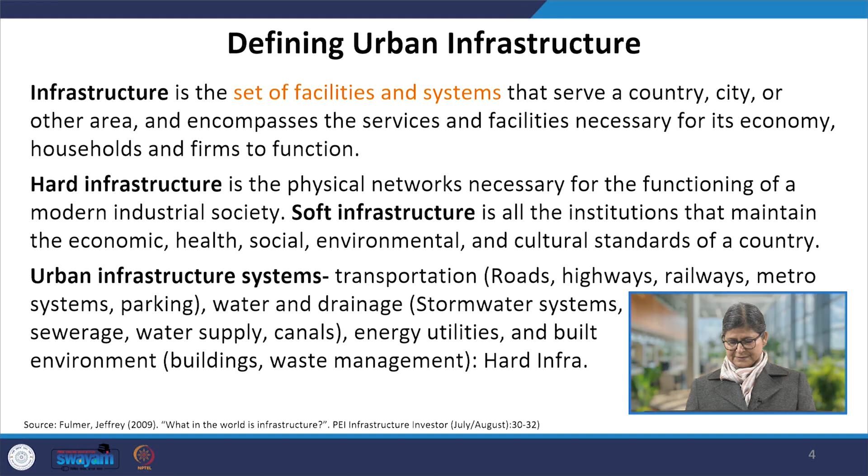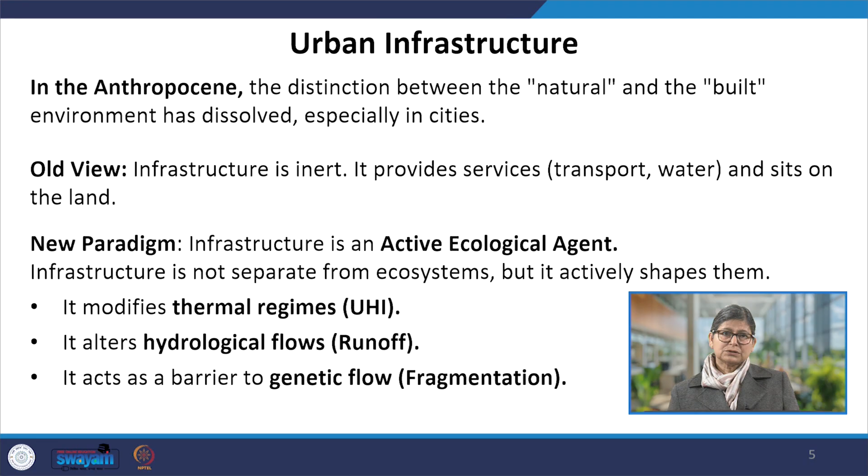In the Anthropocene, the distinction between the natural and the built environment has dissolved, especially in cities. The old view is that infrastructure is inert, it provides services like transport and water, and sits on the land. But the new paradigm is different. Infrastructure is an active ecological agent. It is not separate from ecosystems, but actively shapes them. It modifies thermal regime, alters hydrological flows, and acts as a barrier to genetic flow, causing fragmentation.

Urban infrastructure today, in the new paradigm, includes grey infrastructure: transport, water supply, sewerage, drainage, energy, solid waste, etc. Green blue infrastructure: urban forest, wetlands, ponds, green roofs, floodplains, tanks, etc. And social and institutional infrastructure, which again has both hard and soft components: health, emergency services, governance capacity, etc.

Negative impacts of urban infrastructure include habitat loss, fragmentation, hydrological modification, and pollution, whereas the positive potential is there, like creating green corridors, water retention, and biodiversity enhancement. Assessment challenges exist for urban infrastructure, such as quantifying ecosystem services lost versus potentially restored. This is one very strong challenge in urban infrastructure assessment.

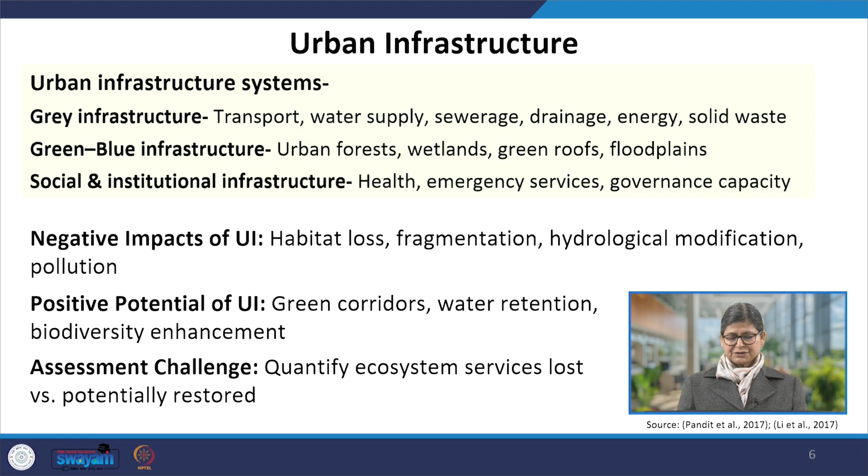Now, if we try to understand the theoretical perspective of infrastructure assessment, let us first understand infrastructure ecology. The transition to a grey-green-blue paradigm requires an integrated assessment. We must evaluate infrastructure not just on its engineering performance, like traffic volume, but also on its ecosystem service performance, like landscape permeability, heat mitigation, etc.

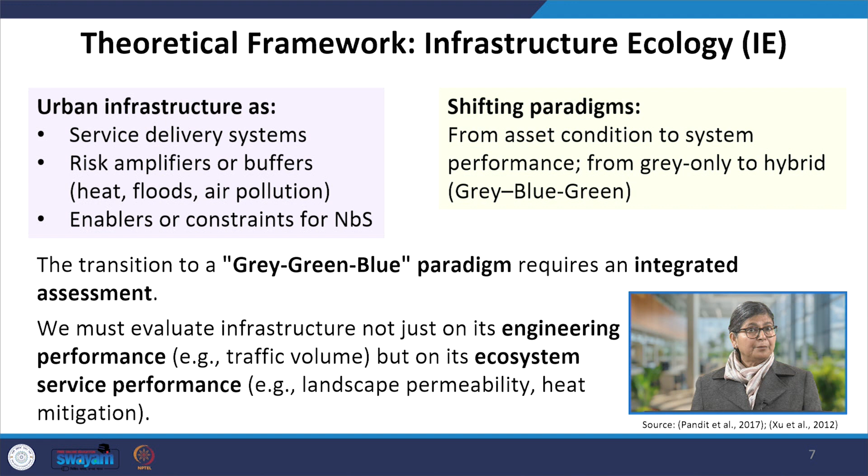We look at urban infrastructure as service delivery systems, risk amplifiers or buffers for heat, floods, and air pollution, and as enablers or constraints for nature based solutions. This shifting paradigm is from asset condition to system performance, that means from grey only to hybrid, which is a very strong shift in understanding urban infrastructure ecology.

Analyzing urban infrastructure not as isolated civil works but as a complex adaptive system analogous to a biological ecosystem is the major tenet of infrastructure ecology. The key interaction is the gray-green interface.

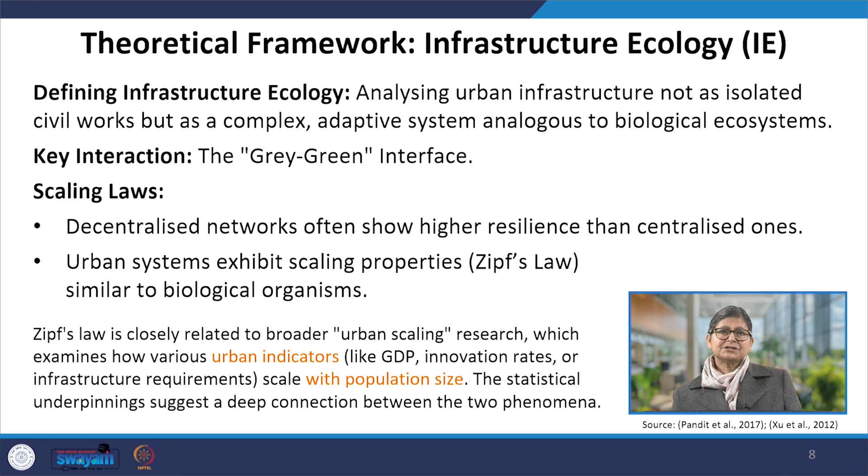Scaling laws show decentralized networks often have higher resilience than centralized ones. Urban systems exhibit scaling properties, Zipf's law, similar to biological organisms. Zipf's law is closely related to broader urban scaling research, which examines how various urban indicators like GDP, innovation rates, or infrastructure requirements scale with population size. The statistical underpinnings suggest a deep connection between the two phenomena.

Valuing nature based solutions in planning requires cost benefit analysis of NBS. We have discussed this premise earlier, but it is very pertinent to bring it back. To justify NBS in a performance based plan, we must value them. Grey infrastructure is easy in terms of cost, while green infrastructure benefits are diffused.

So we discussed several different ecosystem service estimations, and the last one, which we discussed in detail, is the total economic value: direct use like timber and water, indirect use like flood control and carbon sequestration using social cost of carbon, and non-use existence value, which also covers biodiversity.

In Bangalore, studies showed that lake rejuvenation had a higher benefit cost ratio than building new grey STPs when ecosystem services were valued. That is exactly the reason why we need to really assess these systems properly.

The economic imperative for why we integrate ecology is the resilience dividend. The CDRI Global Infra Resilience Report 2023 finding talks about economic losses from service disruptions, which are 7.4 times higher than the direct damage to infrastructure assets. What is the implication of this finding? A road washing away costs, let's say, X to repair, but the stopped trade will cost you 7.4X.

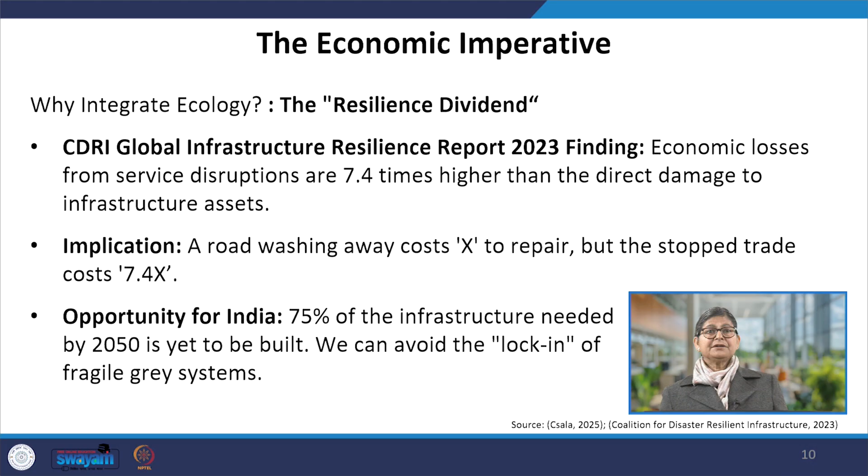75% of the infrastructure needed by 2050 is yet to be built. We can avoid the lock-in of fragile gray systems intelligently.

Now I will discuss, through a tabular form, the evolution of infrastructure assessment metrics. The dimensions are transport, drainage, built environment, and disaster resilience. The traditional way of looking at them includes vehicle capacity and pavement roughness index. We will also check performance-based ecological or integrated indices, like landscape permeability index, wildlife mortality rate, roadkill per kilometer, and carbon intensity of travel.

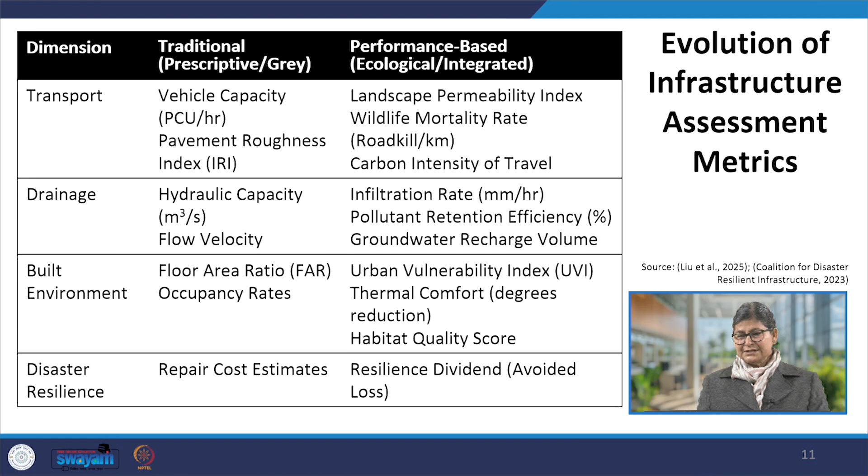For drainage, similarly, the old metrics were hydraulic capacity and flow velocity, whereas now we are trying to go for integrated ones like infiltration rate, pollutant retention efficiency, and groundwater recharge volume. For built environment, other than FAR and occupancy rates, we now discuss urban vulnerability index, thermal comfort, and habitat quality score. For disaster resilience, repair cost estimates is the old way of looking at things; now we look at resilience dividend and avoided loss. So that's how infrastructure assessment is evolving.

The barrier effect: roads and railways act as semi-permeable membranes dissecting habitats. Populations isolated by highways lose genetic diversity, becoming less viable. Edge effects: disturbances like noise, light, and invasive species extend hundreds of meters beyond the road edge.

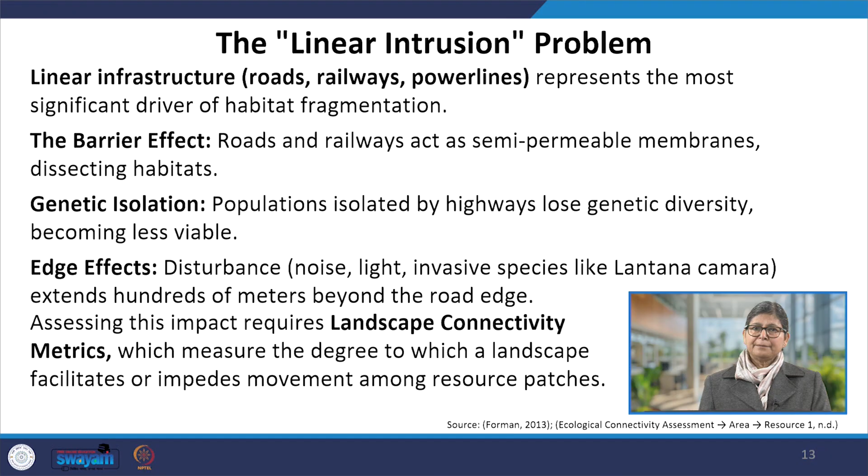Assessing this impact requires landscape connectivity metrics, which measure the degree to which a landscape facilitates or impedes movement among resource patches - core metrics of assessment. So you could understand the traditional assessment methods will not work anymore. We need to bring other complementary tools also, like core metrics for assessment.

Structural connectivity measures the physical arrangement of habitat patches - Euclidean distance, nearest neighbor distance, and so on. This is a static measure. Functional connectivity is a more integrated one that measures the behavioral response of organisms to the landscape. It accounts for the fact that a tiger may cross a 50-meter gap that a frog cannot.

Very true. The Integral Index of Connectivity (IIC) is a graph theory-based metric that evaluates the importance of each habitat patch and corridor in maintaining the overall network. There is also probability of connectivity, similar to IIC but based on probabilistic dispersal kernels, showing where an animal may go.

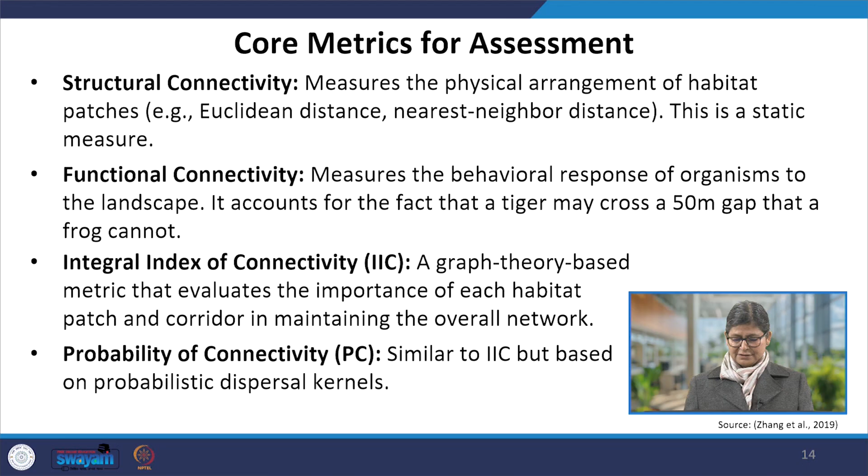Next, the circuit theory methodology. You can see in this image that this color shows very high values and this bluish color shows low values. You treat the landscape as an electrical circuit. Forests are the conductors with low resistance, whereas urban areas or roads are the resistors with very high resistance.

The tool is Circuitscape, and the map shows current density. High density indicates a pinch point or critical corridor where animals are forced to move, identifying the exact location for wildlife crossings, and it helps a lot when designing corridors.

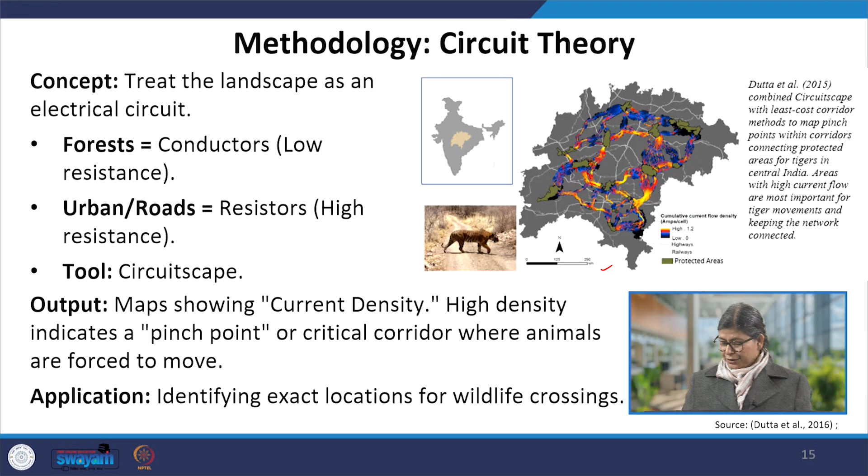Mitigation design: bridging the gap. Assessment must lead to a design intervention. The goal is to restore the permeability.

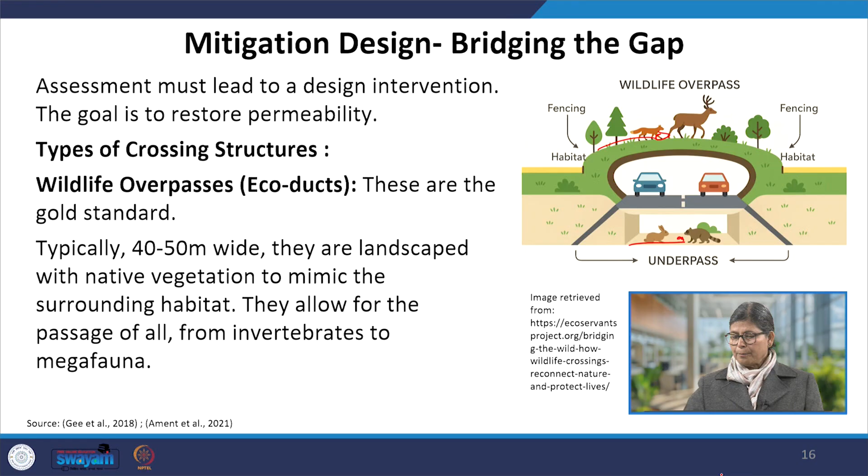Wildlife overpasses are the gold standard, typically 40 to 50 meters wide. They are landscaped with native vegetation to mimic the surrounding habitat and allow passage for all, from invertebrates to megafauna. You can also make different routes - a small underpass for smaller fauna and a separate crossing for bigger megafauna - which can also cross from the top, with vehicular access in between.

Underpasses for large mammals will require more than 10-meter width and 4-meter height, essential for elephants and giraffes. Box culverts are useful for small mammals if dry ledges are provided to allow passage during high water flow.

Canopy bridges - rope ladders or steel cables strung between trees across the road - are critical for arboreal species like the hoolock gibbon or giant squirrels that cannot move on the ground.

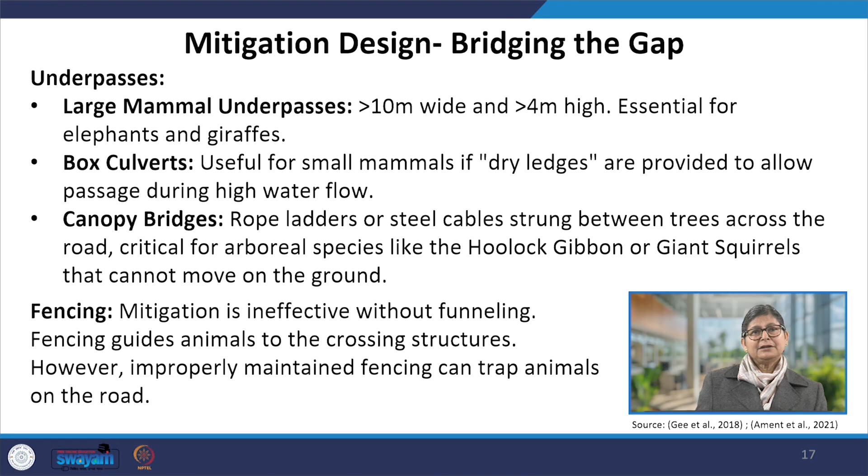You can also go for fencing. Mitigation is ineffective without funneling - fencing guides animals to the crossing structures. However, if it is not done properly, the fencing may trap the animals on the road. So it has to be designed, implemented, and maintained correctly.

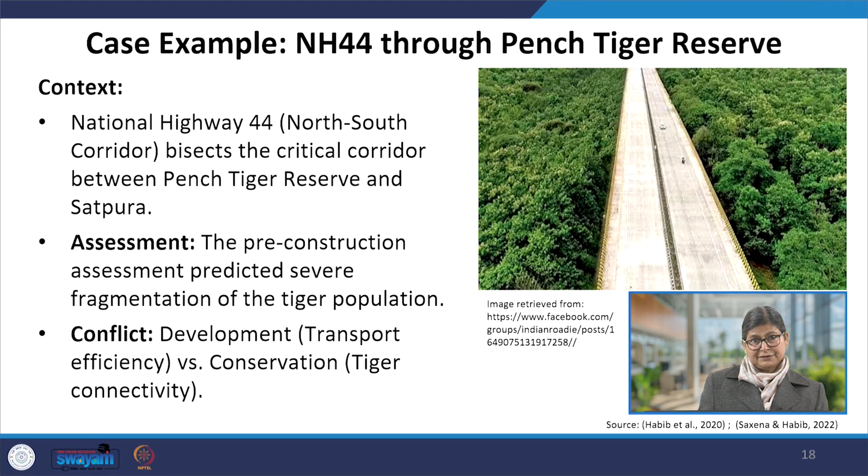I can give you a good example from the Pench Tiger Reserve. This is NH44, which bisects the critical corridor between Pench Tiger Reserve and Satpura. The pre-construction assessment predicted severe fragmentation of the tiger population. Development versus conservation is the conflict, with transport efficiency and tiger connectivity as the two indicators.

So for infrastructure as ecological integration, we find construction of 9 dedicated wildlife crossings in different locations - animal underpasses and minor bridges, and 750-meter underpasses among the largest in the world, 300-meter underpasses designed for light and visibility, to reduce the tunnel effect and encourage prey species like chital and gaur to enter.

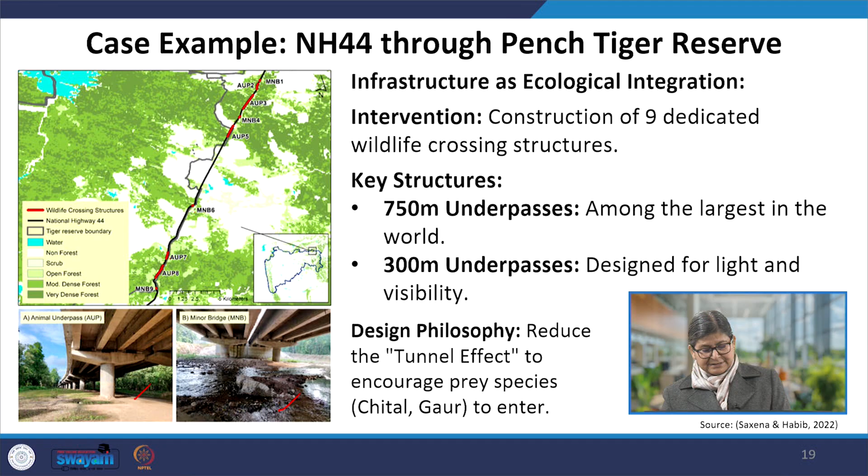Did it work? From 2019 to 2020, for one year it was monitored. 18 to 21 mammal species were recorded using this structure, with 89 crossings by 11 unique tigers in 10 months. The prey trap fear - critics feared predators would ambush prey in the tunnels - but analysis of time gaps showed no statistical evidence for trapping. Predator-prey dynamics mimic the open forest. Large spans, more than 50 meters, are essential for herd animals because of their huge sizes as well as numbers.

Now we come to water and drainage, the next infra. The urban hydrology paradox in India: the grey approach is rapid conveyance, flush water out first, but urban flooding and groundwater depletion are happening together. The blue-green approach is retain and infiltrate - the result is you mitigate the flood as well as recharge your aquifer. Infiltration rate and runoff retention are the assessment metrics.

Pre-urbanization, 10% runoff and 50% infiltration. Post-urbanization, 55% runoff and 15% infiltration. The goal is to restore the 50% infiltration target.

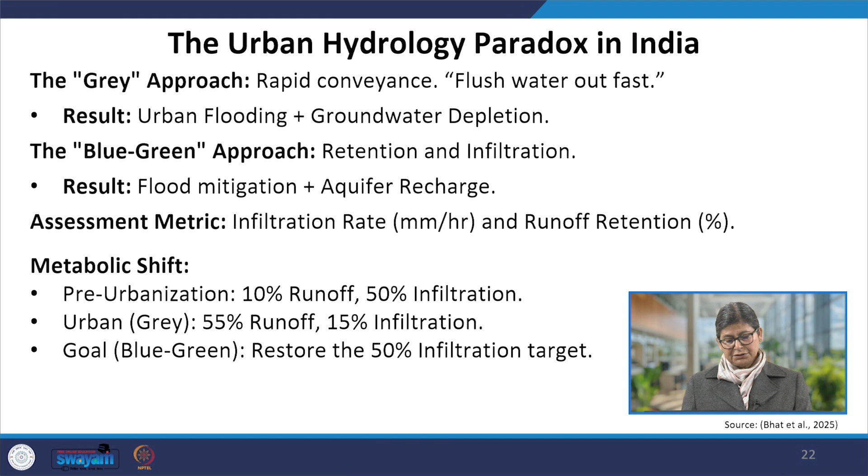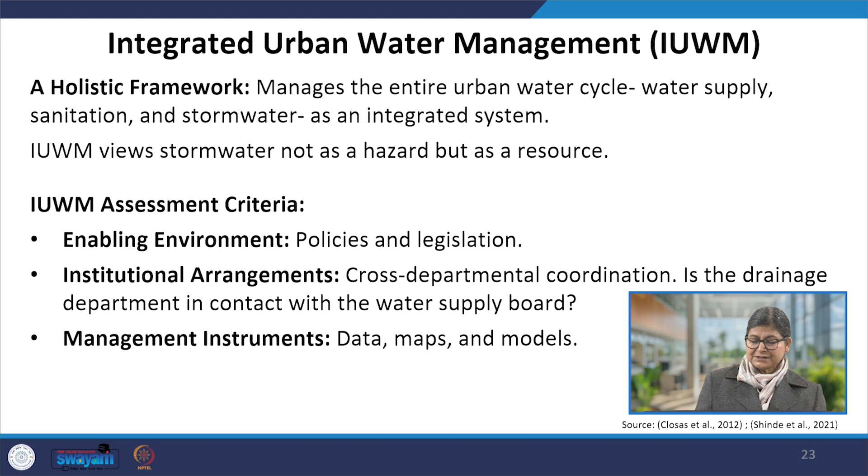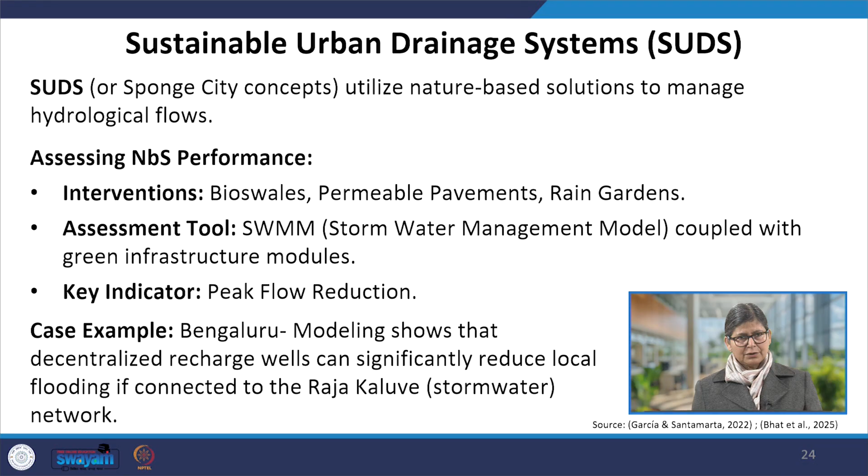And for case examples, I can again cite Bengaluru. The modeling shows that decentralized recharge wells can significantly reduce local flooding if connected to Raja Kaluve, the traditional stormwater network. Another case example I'd like to bring here is the Yamuna Biodiversity Park in Delhi.

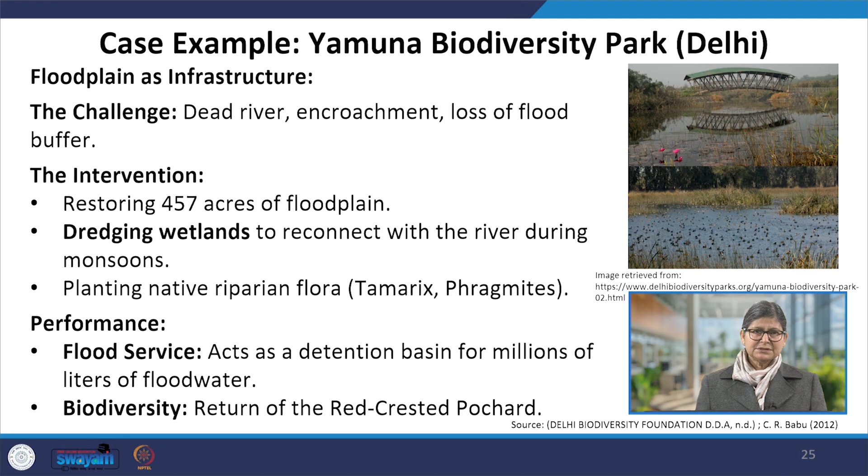There's the floodplain as infrastructure, and many countries have actually gone for it. Again I bring the example of Kyoto city - they have also used the floodplain as infra. Dead river encroachment, loss of flood buffer, that's the challenge. The intervention: restoring 457 acres of floodplain, dredging wetlands to reconnect with the river during monsoons, planting native riparian flora. Performance: it acts as a detention basin for millions of liters of floodwaters, and for biodiversity, the return of the red-crested pochard.

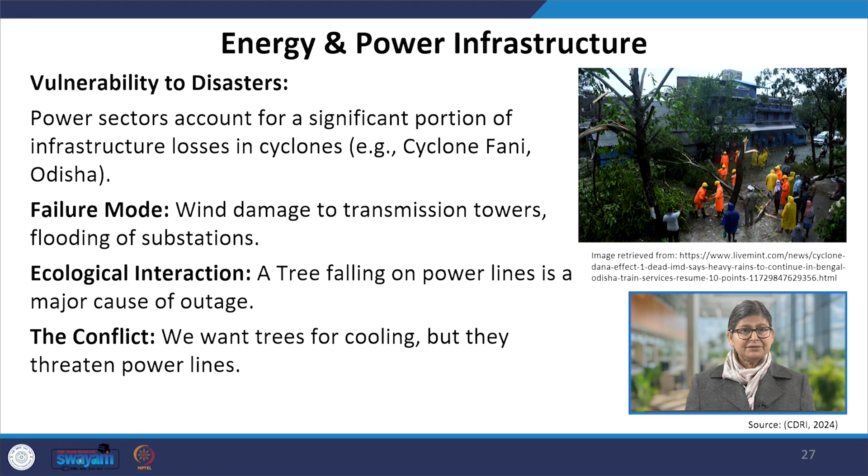Next sector is energy and power, and here we first discuss vulnerability to disasters. Power sectors account for a significant portion of infrastructure losses in cyclones. Cyclone Fani in Odisha - whenever strong wind happens, we first see the casualties in the power lines: wind damage to transmission towers, flooding of substations, that's real havoc during strong cyclones. Tree falling on power lines is a major cause of outage. We want trees for cooling, but they threaten the power lines - that's the conflict.

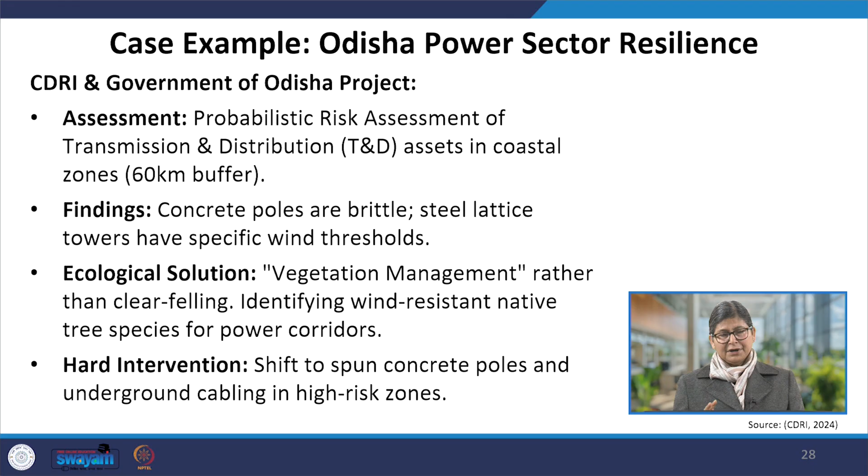Recommendations include vegetation management rather than clear felling, and identifying wind-resistant native tree species for power corridors. The hard intervention suggested is shifting to spun concrete poles and underground cabling in high-risk zones - a very realistic, wise intervention. This calls for performance-based planning frameworks for infrastructure assessment.

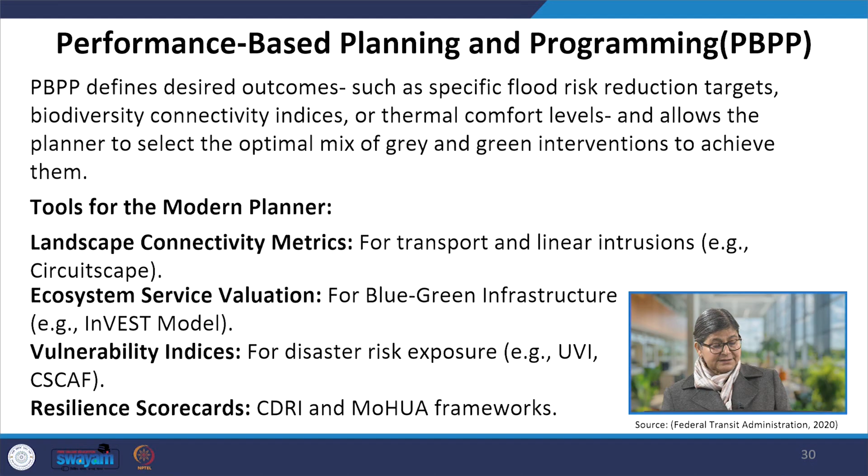Landscape connectivity metrics are very helpful for transport and linear intrusions, like Circuitscape, which we discussed. Ecosystem service valuation like blue green infrastructure, the InVEST model, TEV, etc. Vulnerability indices for disaster risk exposure like UVI, CSCAF. Resilience scorecards, CDRI, and MOHUA frameworks, which we discussed.

This PBPP can be effectively integrated with the urban infra ecosystem, shifting planning from prescriptive zoning to outcome-based performance. Eco performance metrics, like in Italy, cities have integrated PBPP into master plans by requiring new developments to meet specific ecological performance scores, such as a rainfall infiltration effectiveness, or RIE, index for soil permeability to gain building permits. So you bring it into the policy as well.

NBS infrastructure assets in a PBPP framework, NBS like green roofs or urban wetlands are treated as functional infrastructure. Their performance in reducing urban heat or managing stormwater is measured against regional environmental targets.

Multi-objective programming, PBPP allows agencies to link transport investment with other urban goals. For example, a transportation project might be programmed only if it meets performance targets for air quality or flood resilience through integrated green corridors. Then only that particular project will get approval. So this is multi-objective programming.

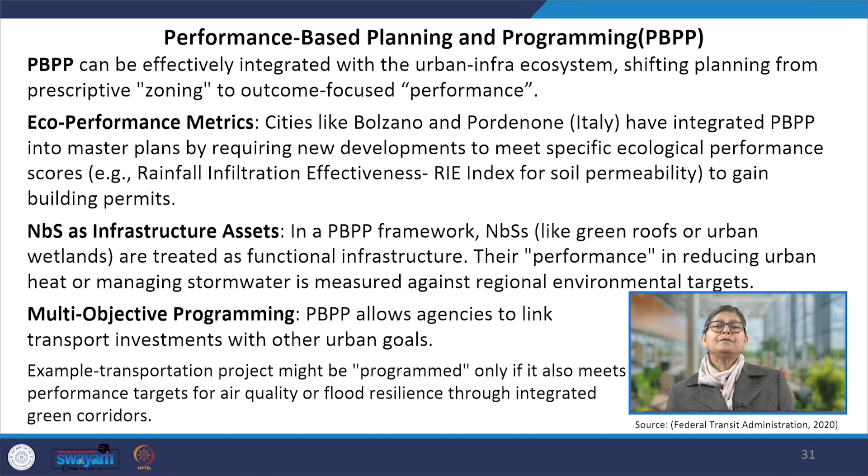So that's the way performance-based planning and programming is very different from our traditional way of planning. This shifts planning from prescriptive standards to measurable infrastructure performance outcomes under real constraints of soil, climate, assets, and governance. Planning decisions are guided by measurable system performance rather than prescriptive standards or uniform design templates. Key attributes are explicit performance metrics, context-responsive thresholds, asset plus system performance, monitoring and feedback, adaptive programming, etc.

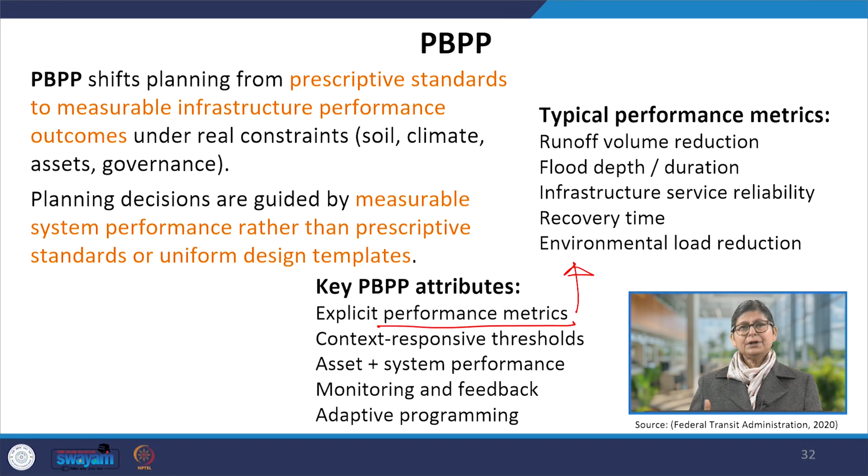If you take these performance metrics, you can see that even within the performance metrics, you can look at runoff volume reduction, flood depth duration, infrastructure service reliability, recovery time, environmental load reduction, etc. So for each one of them, you can go for certain sub-performance metrics identification.

I will discuss two cases with you. First one is Warangal from Telangana. Let me give you some background to this particular case.

Urban tank network and drainage modernization. In response to haphazard urbanization, the authorities and state agencies initiated a series of interventions aimed at understanding and improving the performance of the city's drainage and water storage systems. What is the traditional water storage system they have? They have traditional tanks. These efforts focused on mapping tank cascades, identifying encroachments, assessing drainage bottlenecks, and evaluating the interaction between roads, culverts, and natural flow paths, rather than treating tanks solely as heritage or recreational assets, which happens in most cities.

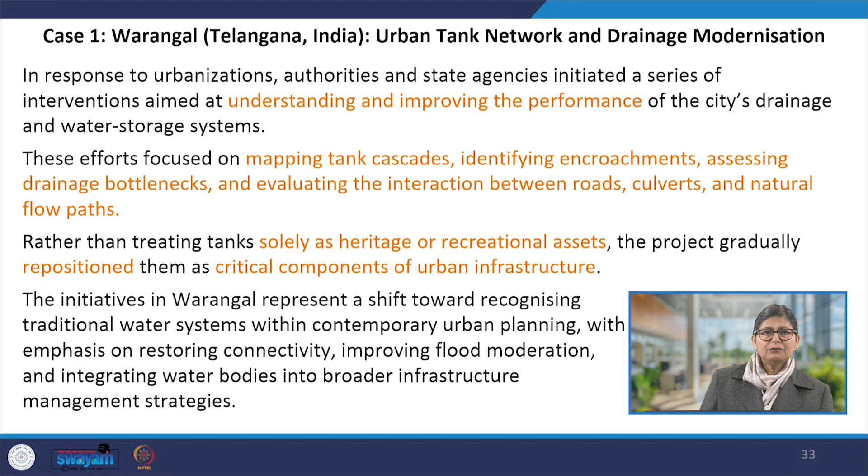The project gradually repositioned these tanks as critical components of urban infrastructure. Their cascade means whoever is at the higher level, the next level can take that water, the additional runoff - everything was mapped. This initiative in Warangal represents a shift toward recognizing traditional water systems within contemporary urban planning, with emphasis on restoring connectivity, improving flood moderation, and integrating water bodies into broader infrastructure management strategies.

So the PBPP framing emphasizes hydrological performance over asset provision. Instead of asking how many drains or how wide the road should be, the assessment asked: does the system safely convey, store, and release stormwater? Are tanks functioning as flood-buffering infrastructure? So the questions were different.

The insight gained from this project is decisions were guided by whether flood performance improved. Infiltration was selectively applied, not mandated or prescribed. For shallow or compacted soils, performance shifted to storage, because there you cannot expect good performance. Infrastructure redesign was justified by measured failures, not norms. Gray upgrades were justified only if they improved system performance. So that's the way Warangal is a very good case for this PBPP framing.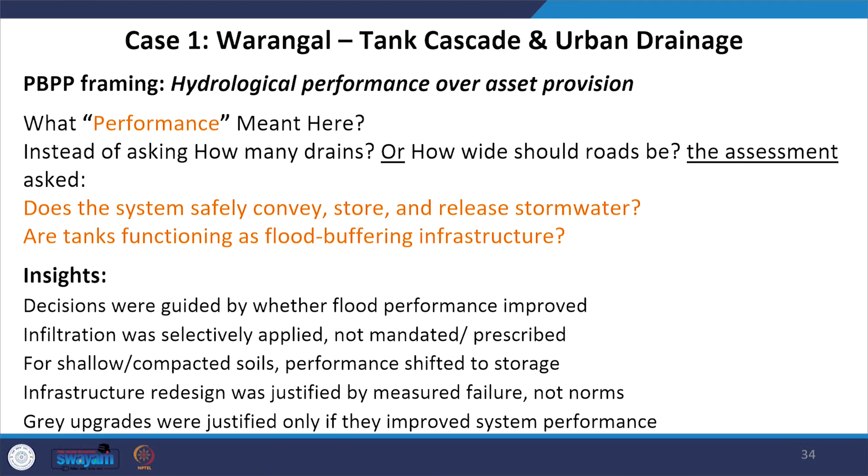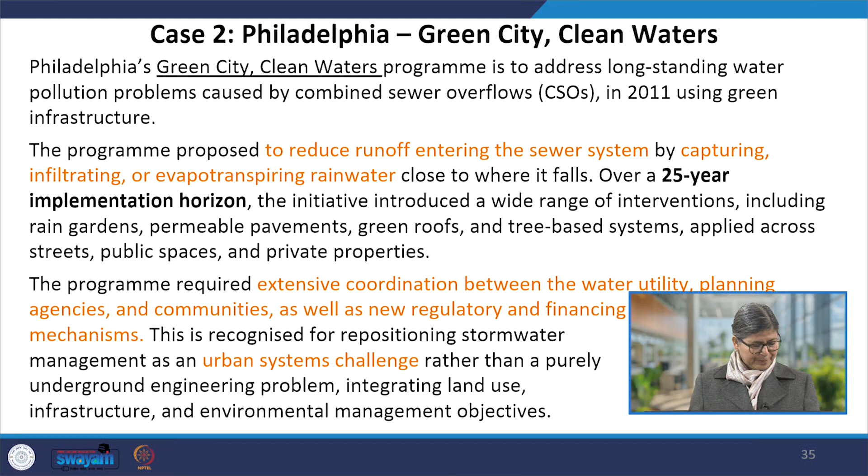So it is again another good case of performance based planning practice. The framing was runoff reduction performance replacing sewer expansion. So what was the performance asked from the project? How much runoff volume must be removed from the combined sewer system? Not how many rain gardens or how much green cover. So the performance target was fixed: this is the amount of runoff that needs to be removed from the system. It cannot take any more.

Insight from this project is that success is judged by measured performance, not visual greenness. Green infrastructure is treated as regulated infrastructure. Planning, design, operation, and maintenance are aligned to performance targets. Performance is monitored continuously. Designs changed when infiltration underperformed. So it's a flexible system as well.

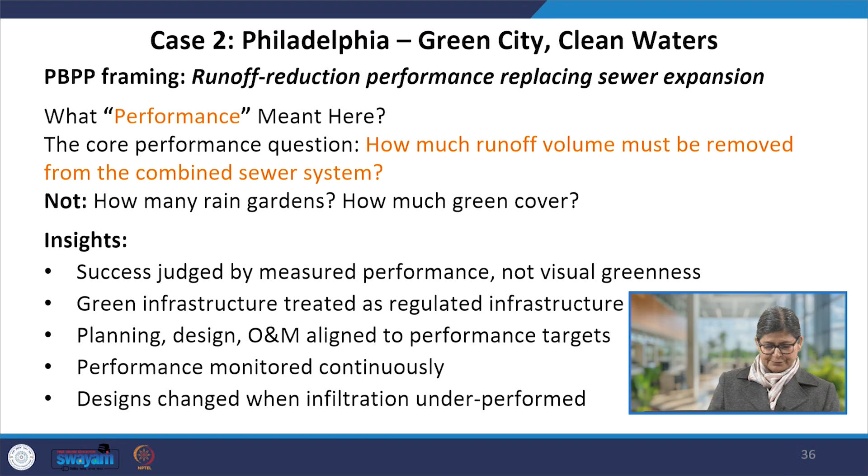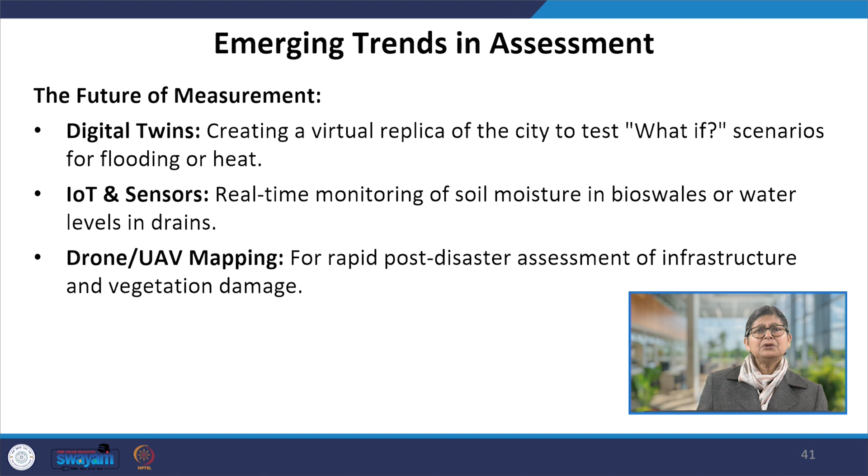The future of measurement: digital twins creating a virtual replica of the city to test what-if scenarios for flooding or heat or any other challenge. IoT and sensors for real time monitoring of soil moisture in bioswales or water levels in drains. Drone or UAV mapping for rapid post-disaster assessment of infrastructure and vegetation damage. So there are also new trends in the assessment - new tools, new techniques.